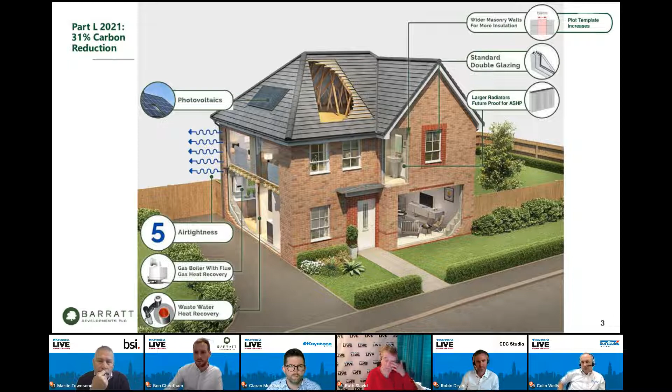And then also, do we implement mechanical ventilation? Not only to manage indoor air quality with continuously running extract fans in wet rooms and things like that, but also to mitigate the risk of overheating. So yeah, this was a couple of ideas - you'll notice a gas boiler there as well.

As I've mentioned, we're looking at a phased approach to introducing air source heat pumps. We know they're going to play a key role in decarbonising our housing stock, both new build and retrofit, but they're not necessarily going to be the only solution. We're doing lots of work around heat networks, and there are other low carbon options being reviewed and looked at, but we're actively using heat pumps today.

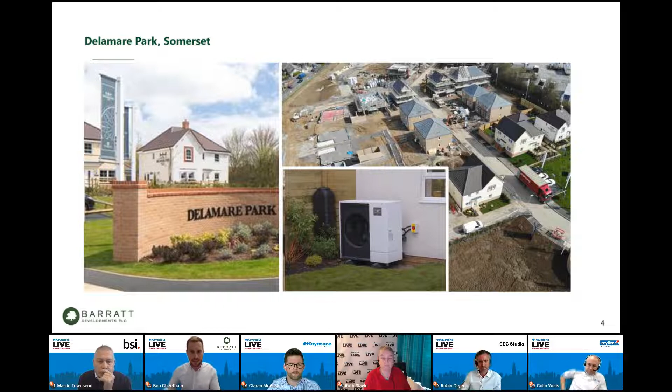We've got customers living in properties with heat pumps, and a few of the challenges to deliver them at scale are really supply chain concerns and installers - there isn't enough accredited installers today to deliver these at scale. So we're currently working collaboratively with air source heat pump manufacturers, government, the Heat Pump Association, and crucially our own contractors. We're really encouraging our own plumbing and heating contractors to get upskilled, go and get heat pump training, and prepare themselves.

I won't go through all of this in the interest of time, but just the knock-on effect of the new technology - we're adding more complexity into the home, so it has a knock-on effect across various departments and areas. I'll just pick a few out: putting PV on every single house type now means less hipped roofs and more gabled roofs, because pretty much the whole roof needs that PV allocation on there.

Customer education - we touched on this a bit in Martin's presentation, but it's going to be crucial. We can deliver really energy efficient zero carbon houses, but we need customers to adapt their behavior and ensure they understand how to operate their homes efficiently.

And then skills and capacity - obviously we're adding new technology, we've mentioned heat pumps and PV panels. As an industry, the target is 300,000 houses. If we're all going after those particular products, it puts even more pressure on an already strained supply chain and the installer base as well. So just a couple of challenges and barriers that we're currently working through and addressing.

And then when we look at how we can deliver a 75% carbon reduction from the Future Homes Standard, it's really everything I've just said - heat pumps or other sources of low carbon heating, but also things like battery storage.

Do we start adding batteries in so the home can become smart about how it manages energy? Actually storing energy, selling it back to the grid when it's more preferential rates, or using it when it needs to, and looking at smart systems to actually manage all the different technology within the house.

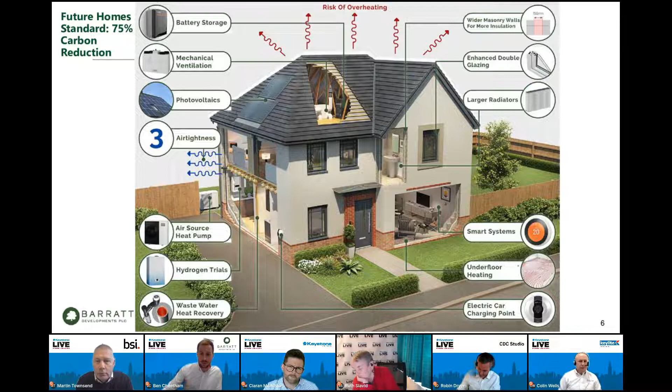And then again, some of the key challenges around delivering the Future Home Standard today. Skills is a real challenge that I've touched on. If we just pick PV out again, our allocation for PV is probably in the region of 90 to 100,000 panels a year, times that by the rest of the industry. It's a lot of PV panels, a lot of installers that we need to gear up and get ready.

Supply capacity, we have seen obviously some serious challenges in the supply chain over the last 12 months. So that remains a concern as we move forward.

Overheating, as we're making our buildings more thermally efficient and with obviously a warming climate, we need to be mindful of overheating. Do we need to start looking at more north-facing elevations, reducing window sizes, or even looking at cooling later down the line at some point as well, be something we need to think about.

And then grid capacity, we're obviously electrifying our homes, heat pumps, EVs, everything will be electric. What impact does that have on the grid? Does it have capacity? There are legitimate questions around that, as well as EV chargers as well, I should add in.

The snake diagram in the middle here is really just to highlight the challenge with heat pumps that we're actively working through. If you're a plumbing and heating contractor today, it's still quite a lengthy process to become heat pump accredited. It can take several years, and there's quite a lot of paperwork involved. So we're actively trying to encourage, how can we slimline that? How can we incentivize our current gas engineers to go away, upskill themselves, and want to do it?

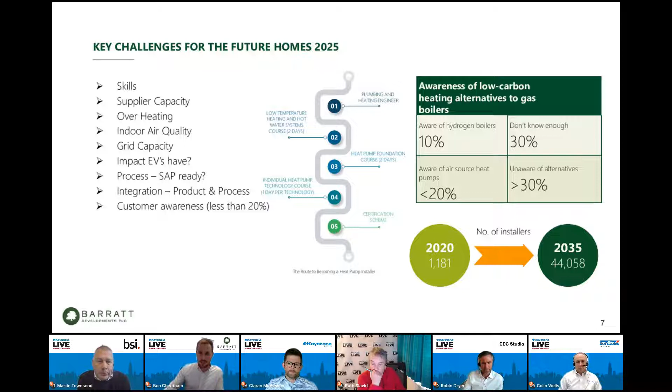And also just a bit on customer education. We're doing lots of research around our customers. There's still a lack of awareness around heating systems, although I would say certainly in the last couple of years, we've seen the shocks to the energy market. More and more of our customers are asking about how much does this house cost to run, what is the heating system, which certainly it never used to be.

And then the second part of my presentation, I just wanted to talk around our Z House. This is a concept house that we built in conjunction with Salford University. It's a zero carbon house, and we want to go way beyond the Future Home Standard. So it delivers around 125% carbon reduction, going beyond the Future Home Standards.

And the idea behind this is we wanted to build not only a zero carbon house, but we wanted to challenge the supply chain in what technologies are available, in order for us to really scale up and be commercially viable for a national developer to deliver at scale. And we had a number of drivers.

We wanted to look at not only regulated and unregulated energy, we also wanted to look at embodied carbon. Embodied carbon is really important, and I'm sure others may pick up on this later. So we looked at how we can reduce the embodied carbon within the property. We also looked at reducing waste, reducing water - obviously water is scarce in certain areas - and also nature and biodiversity, how do we improve that. So there are lots of different areas that we addressed in this sort of concept house.

So we used a combination of MMC systems. I'm just going to run through a couple of these here. You'll see, for example, the roof was actually built on the ground with the PV panels and the tiles pre-installed, and that was craned into position. You'll see here the external brick - they were full brick panels, full elevations that were craned into position. So we actually didn't have a bricklayer on the site.

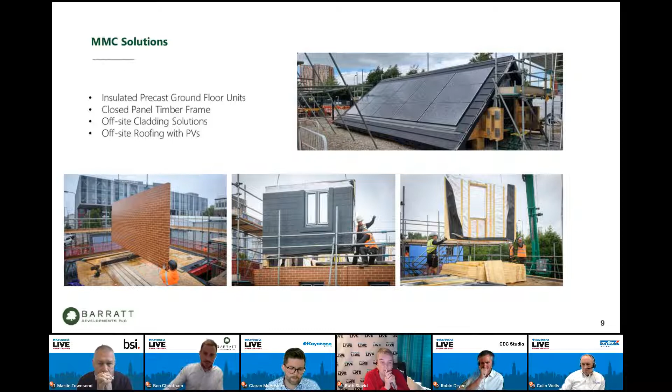So we're thinking about the future as we need to grow our housing. There is an underlying demand. We need to think about different options about how we can not remove the reliance on, for example, bricklayers - they're going to be a key part of moving forward - but to grow further, we need to look at more MMC systems as well. And then low carbon heating: we used a Mitsubishi Ecodan heat pump.

Several years ago with heat pumps, there were a lot of concerns around noises and how they operate. Today, everyone's been pleasantly surprised how absolutely quiet these things are - very quiet, work really well, and provide nice comfort levels in the house.

So air source heat pumps with a hot water cylinder - we also put two batteries in there, two 10 kilowatt batteries, and there were over 25 PV panels on the roof. So all of this technology, really, what it means in practical terms is 4 or 5 days out of the week, it's actually generating enough electricity to support itself without drawing from the grid.

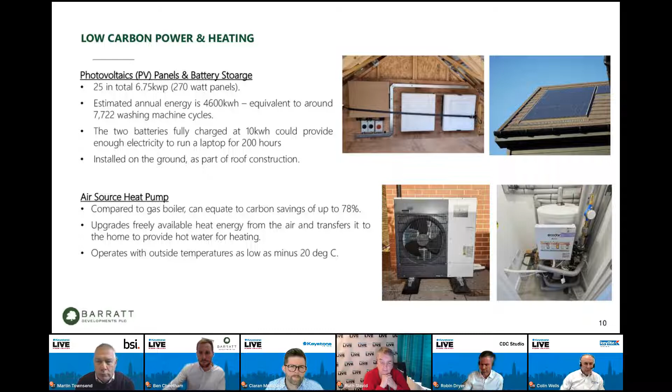So bills on this house were really cheap - I think they were about 30 quid a month, with about 25% of that being a standing charge.

And then we put various emitters in, much to the headache of our contractors. So we put underfloor heating in, and we put radiators. We also put innovative solutions like this thermal - it's called Thermaskirt, a heated skirting board, so hot water pipes running through the skirting board. And we also looked at electric solutions, so infrared heating panels.

So the whole idea around this is we want to test - we have people moving in, and we can independently switch off the different emitters and find out what works, how the occupants are engaging with it, what are the preferences, and this will help shape our decisions as we move forward.

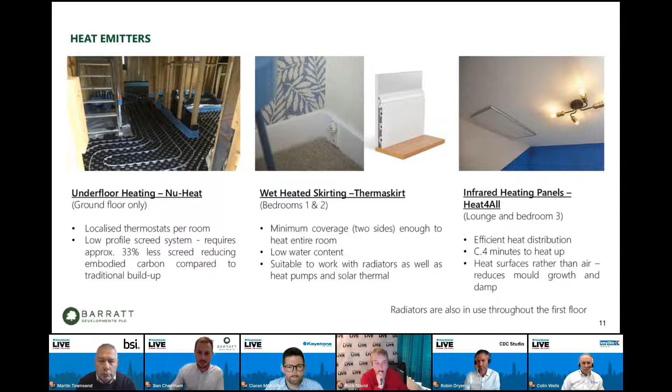And then just a slide on smart tech - so we had lots of smart tech in there around managing the different technologies, voice activated lights and things like that. We also had low flow thermostatic showers.

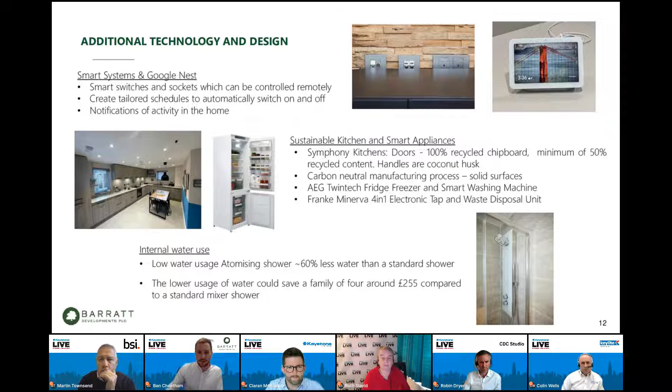So just conscious of the time, looking ahead to the next step - that was a zero carbon house we built at Salford, on the campus. Our next project to further research zero carbon technologies and how we're going to scale up is called Energy House 2. This is a £16 million research facility at Salford.

So it's essentially a large energy chamber, and they can actually control the weather - in terms of wind, snow, rain, and they can make it -20 to +40 degrees. So really we're building a house within this chamber. It's currently under construction at the moment, and we can obviously drop those temperatures.

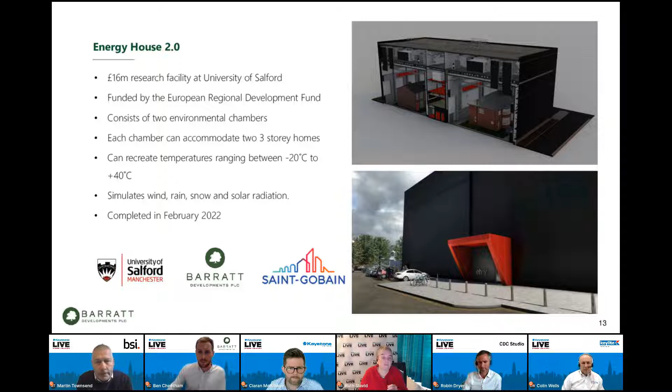We can test efficiencies of, for example, heat pumps and other technologies, and we can learn lessons that we need to take forward as we deliver zero carbon. So here's just an image of where we're at.

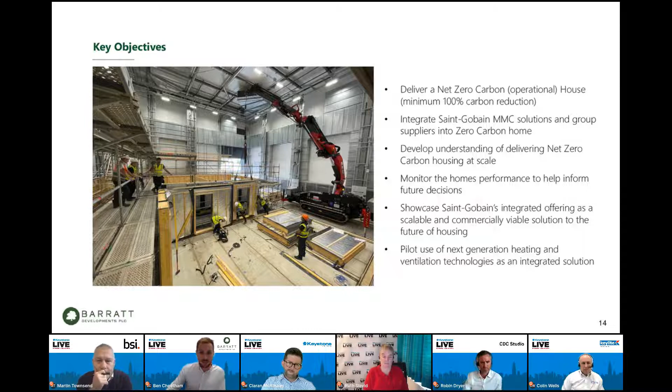So I think that hard data that we're going to get from these projects is going to be crucial as well. So I think really just to sum up, that's what we've demonstrated - zero carbon regulated energy is achievable. We know what we need to do.

There's some barriers in terms of installers - we need to get them ready, we need to get the supply chain geared up, and it'll be a transition. We also need to collaborate with our supply chain - 60% of our emissions come from our supply chain in terms of embodied carbon in the products that we use. And a lot of our suppliers are smaller than us, so it's really important that we collaborate and bring them on the journey as well to drive that carbon down.

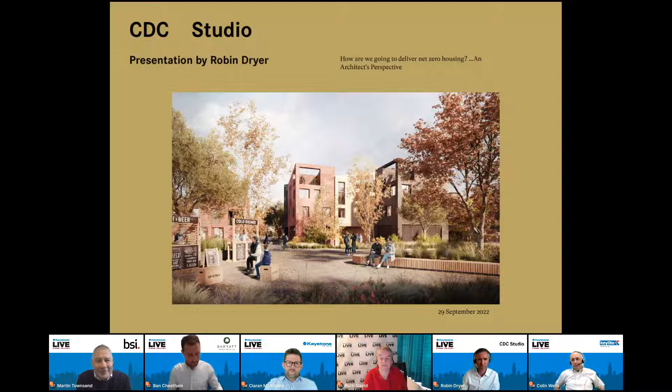I think really the first question is, the UK has set its target for 2050, and it's understanding how we get there. Similar to the previous speaker, there's two elements to this presentation. The first starts by looking at our understanding of where we are and what the market looks like from an architect's viewpoint, and then secondly some of the challenges we have in understanding net zero.

So 2050 seems a long way off, and I appreciate we're not necessarily going to get there exactly at 2050 for net zero—the target is to achieve that before 2050. But I thought it was quite useful to start by seeing, 27 years in the future is 2050.

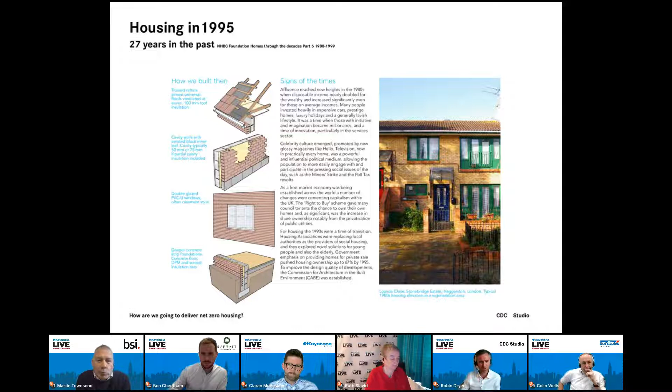But if you look back 27 years, houses broadly—and this came from the NHBC document—we were putting insulation in walls and roofs and a limited amount, if any, in the ground. But the houses themselves were very much similar to what we're looking at today: brick cavity constructions, double glazing. We have moved, and I think we are moving, and there are some really good examples, but I don't think it's moved perhaps as far as it ought to.

If you look at where we're going to be in 2050, I'm not necessarily putting forward that this is where we are going to be heading—I don't think anybody really knows. But I think what we can probably say is that houses are going to be taller, more densely developed as space becomes more valuable, and we're going to be dealing with overheating as the world gets warmer, and that's going to be essential.

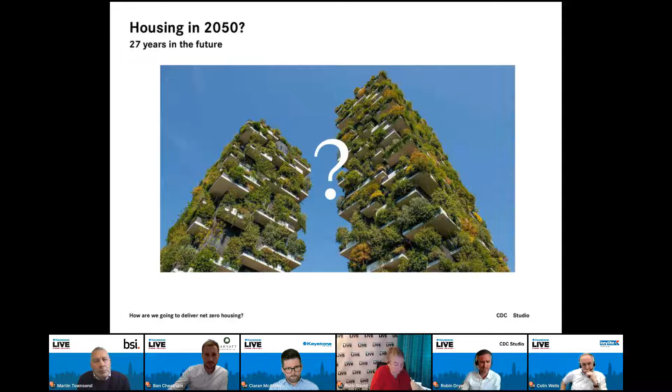But I don't think any of us really know exactly where we're going to be heading. Where we are at the moment, though, is a different sort of picture. I live in Cambridge, and when you look at some key developments in and around Cambridge, it's probably best described as a mixed bag.

I think there's probably an awful lot of gas still being used. I'm not sure there's a lot of photovoltaics on a lot of those developments, and I think a lot of those buildings are being built to the current regulations—for whatever reason, these homes are not being built looking to the future.

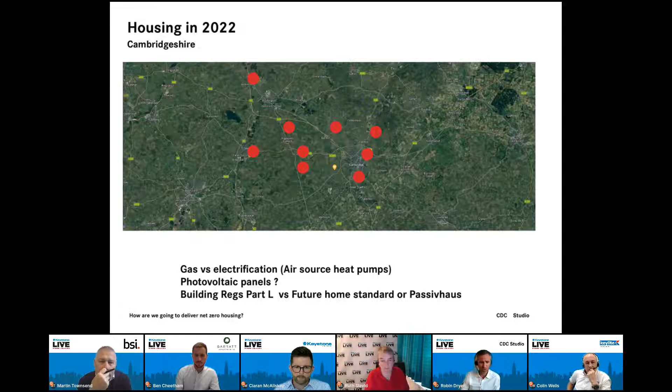I think we'll pick on this later, but if you can imagine some of these homes are being designed now and some are being built now, within 10 years you could be having to replace your gas boiler with an air source heat pump, and that's going to come with a whole range of complications—it's not going to be straightforward. And then you are going to be retrofitting it. If you've bought a house and 10 years down the line you have to start retrofitting things like that, it could feel like something you didn't expect.

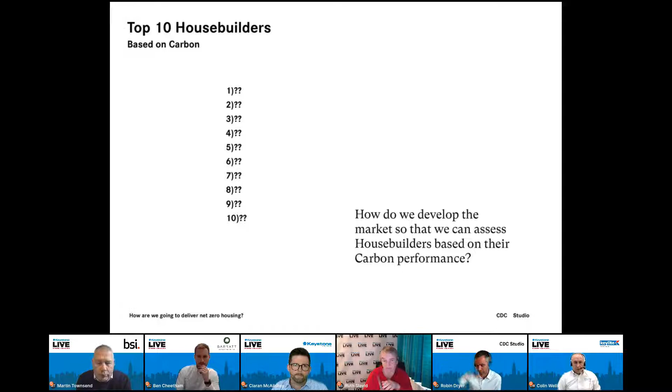When you drill down into these companies, it's interesting that the emphasis is on aesthetic, on delivery, on creating homes, and carbon is low on the agenda, and I think it probably should be higher. What I couldn't find was a top 10 house builders based on how much carbon they have. So the question is, how do we develop a market so we can assess house builders based on carbon, and that will help understand who is doing it right, what homes are doing good.

When you go on holiday, when you go to a restaurant, there's a TripAdvisor that can tell you what's good, what's not good, based on real life experiences. I think it'd be quite nice to have a home builders button on the TripAdvisor website, so people who are buying homes can understand. That slide for Cambridge shows there's an awful lot of houses being built in the area, and it's difficult for consumers to understand which homes are doing what.

I think this is a direction house builders will be going in, though it seems to be slower than we possibly thought it would be. I understand there are challenges on that, but I think this should be the direction we're heading. That previous slide talks about net zero, and I think it's probably worth touching a bit more on what net zero is, particularly from an architect's perspective. If we're going to deliver buildings for net zero, what does that mean, and how does that manifest itself?

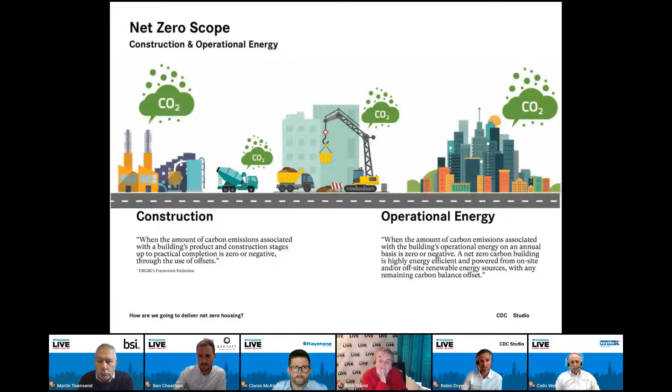It boils down into two camps. The easy one is the operational energy - when you are living in your home, you are operating on a day-to-day basis with zero carbon. Then the other bit is about constructing, building these homes for zero carbon, and actually that's not quite true - the construction bit isn't zero carbon, but the operational bit is the easy bit. So you're looking at low carbon, generating energy to bring your carbon footprint down in operation, insulating so you don't need to use as much energy, and electrifying the energy source so you're coming from a low carbon or zero carbon source.

A lot of these slides I've cribbed, I've found and collected over a period of time. So these are slides which are out there, and I'll give you a pointer perhaps at the end of this presentation.

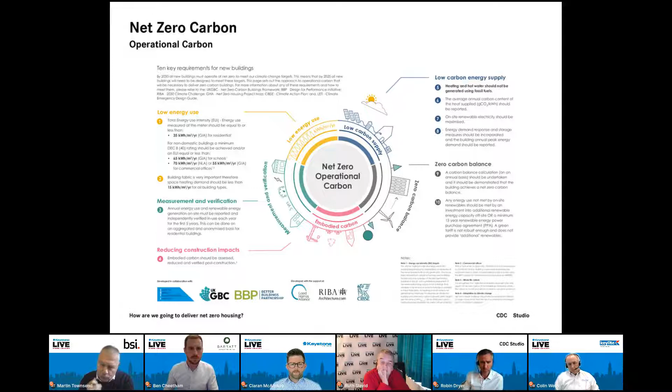Operational carbon, getting that down to zero, I think is relatively straightforward - it is being done and rolled out. I think the hard bit, first to understand and then to actually do, is the embodied carbon in the construction. This is looking at how you integrate carbon, how you mitigate or reduce the amount of carbon all the way from the raw materials - what materials you're using, where it's coming from, and how much carbon footprint that has, all the way through to manufacturing window units, roof tiles, how you're getting it to site, and then how you're building it.

And then once you've built it, it's a whole life carbon. It also picks up on how you look after it. So if you have materials which need to be refurbished or replaced on a regular basis, that's going to incur a higher level of carbon, rather than some products which take very little repair and maintenance. And then the final bit, which concludes all of this, is what do you do at the end of the cycle? That's the whole understanding of the analysis.

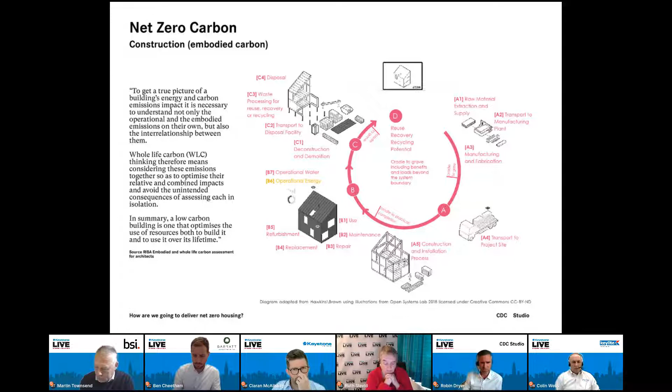I think this is the bit which is harder. It's certainly harder for an architect, and I think it's harder for the industry to come to terms with. There are movements in there, and it is quite interesting.

For the whole life carbon, Sadiq Khan, Mayor of London, the GLA, they have targets. So if you're doing certain developments in the Greater London area, you have to meet certain whole life carbon targets, set by them, and this is something you have to quantify and come back to them with. One example is kilograms of CO2 per meter squared, and they're going to move this target. This is a benchmark for now, and that benchmark will keep moving.

What it's doing is easy steps. So to achieve this it's not completely easy, but it's getting easier, and it will get harder as that target comes down. As an architect, as the design team, as engineers, we need to demonstrate that our buildings are working and can be designed to meet those targets.

So the GLA is one element. There's a document by LETI. If you're not aware of LETI, I'd suggest it's a document you download. It is really important, and within that they've got data and targets for you to pick and choose. These are what you should be working to.

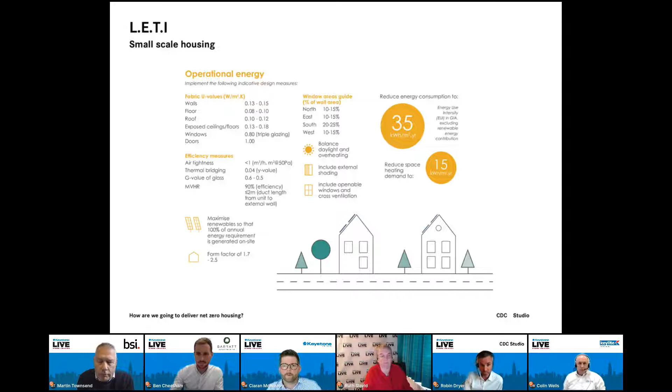So this talks about form factor, it talks about renewables. The operational bit I've talked about, but if you go through the heating, demand, and then onto the embodied carbon, they set targets of 500 kilograms of carbon per meter squared of your footprint area. And how you demonstrate that you've actually achieved that is the challenge. As an architect, that's not easy.

I'm going to move on. What you need is software, and we've had to upgrade ourselves - we've actually purchased the product at the top here, One-Click LCA. How that works is you calculate the mass of each material. We work in BIM, and we break down our BIM model into a schedule of individual materials. That's exactly the shopping list a builder would purchase for your house, and we have to schedule that out up front, give a quantity, and then manually plug that into the software and select products.

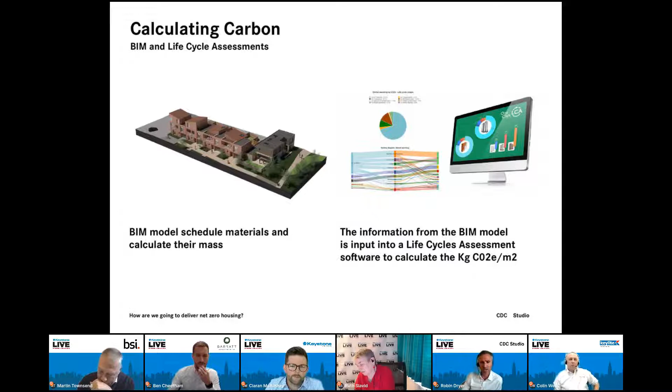The big impact for the industry, and for ourselves - that's not an easy task in itself - but the big challenge is that at an early stage in our design process, we're making an assessment on where that material is coming from. That doesn't really allow for a huge amount of flexibility down the line, if you change it to a cheaper product which comes from further afield with a larger carbon footprint, because that's going to skew your entire data and the figures you need to work to.

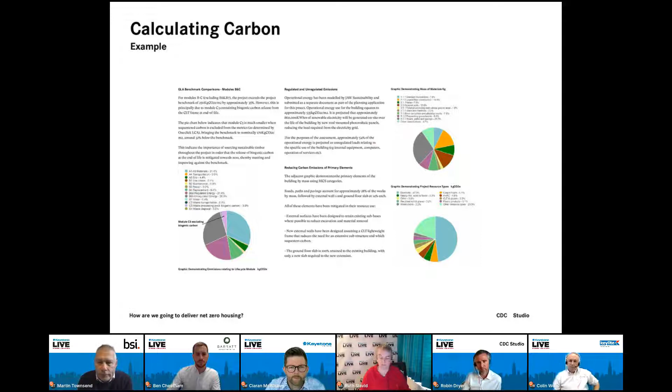And the data which comes out, it's a bit small, but that's fine, it's just a principle. That software gives you charts, it gives you targets, it gives you an understanding of where your carbon is, with big pie charts and big areas. That's important, I think, to the industry, so you can then start challenging. You can understand - it's all about data - where the carbon is on this building. And there's no point tackling the small pies, because it's the big pies you need to tackle. Understanding that is really important.

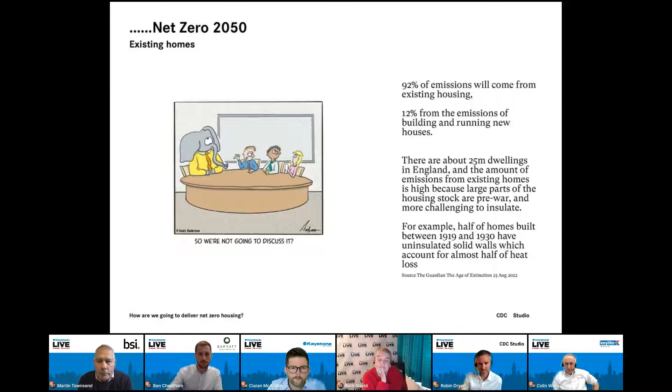It takes an extended program, because we need to factor that in, and it changes and takes a mindset. How we deal with this is perhaps for a different slide. It is going to be very difficult.

My final slide is kind of three things. So what can we do? I think it's top down, bottom up. It would be really good that people are going in - people are buying electric cars, and they're probably asking more pertinent questions on their cars than they will on their houses. I think that will change, so them coming in and asking questions about how their building is being heated, where the energy is coming from, and how efficient that building is, would be great.

Top down, we need more legislation. Future Homes is coming in, and I'd like to see that accelerated. I think it will shift the marketplace. Calculating carbon data, I think, is really important, and it gives everybody an understanding of where we are, and at the moment that isn't completely clear. Communication, changing that agenda, and I've mentioned the retrofit.

Two final things - there's 3 websites there, I'm sure there are others, and they're a very good point if you want more data. And finally, the image on the right - this isn't a project we've been involved in, but we are aware of it. There are developments out there which are zero embedded carbon and net zero energy in use - those are the two things, and a lot of developments are just working on one of those. I think actually getting both is really important.

Right, thank you very much.

Thank you, Robin, that was an amazing amount. I started off being really depressed by those schemes that aren't doing anything, but I think by the end we were seeing ways that things can happen. I wonder how much impact the dreadful circumstances we're living through at the moment are going to have, in terms of people having to look at what their fuel costs are, and wanting to live somewhere where those costs are going to be lower.

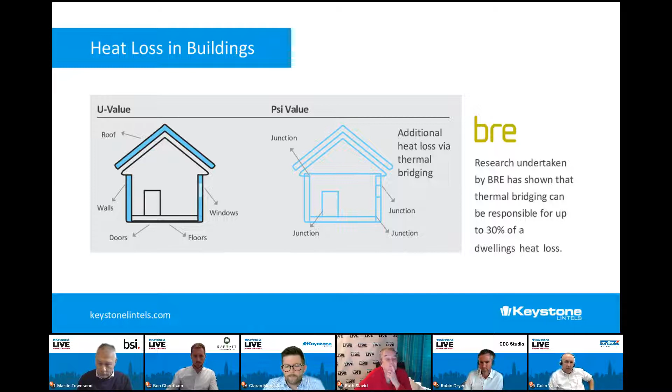Part L is very much seen as one of the first stepping stones in the government's pursuit of net zero due to the significant energy usage of households. In the UK today, the average household emits 2.7 tonnes of CO2 from heating their home, and that's not over the course of a lifetime, that's in a single year. That's the equivalent of charging up about 300,000 smartphones every year.

Part L 2022 calls for the reduction of carbon emissions in new homes by 31%, and that's getting us ready for that future home standard from 2025 onwards.

The common misconception about Part L is that the document is for the process of constructing the dwellings and not the day-to-day running of the household. But of course, this is not the case. Dwellings are being designed as per Part L to produce 31% less carbon emissions, and the document looks at a number of measurements, including fabric energy efficiency, energy rate, and emissions.

The introduction of the energy rate identifies the somewhat haphazard approach that has been taken in the past, where builders or assessors alike have looked to offset the use of inefficient materials by hitting targets with renewables such as solar panels. And that sort of upends the energy hierarchy to a certain extent. So it's sensible to reduce energy demand initially before replacing this with renewables.

Due to a lack of accuracy that had previously been seen, Part L has introduced a number of detailed accuracy measures. Some of these measures are minor tweaks to previous requirements, and others will see a relatively significant change in the way construction is run and how accuracy is assessed.

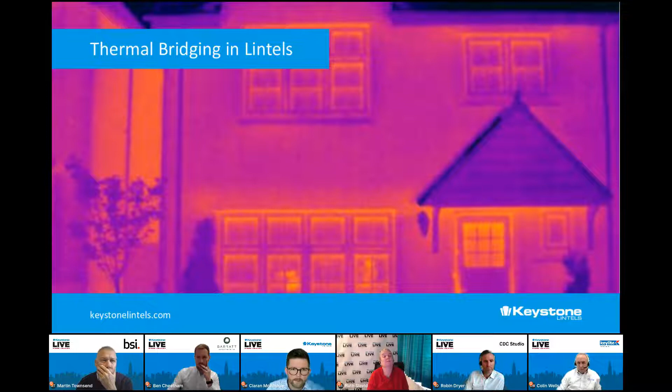With a clear goal of Part L being the reduction of primary energy use, ensuring heat is retained within dwellings is of paramount importance. As such, reducing thermal bridging is a critical component to creating a thermally efficient home. Obviously, as Martin had mentioned earlier regarding the summer, his house is cool in summer, so we always have to take that into account.

Treating Part L as a stepping stone to the future home standard means taking a fabric first approach, which puts us all on the front foot when it comes to designing dwellings to reduce carbon by 75 to 80%. A fabric first approach means designing to maximize the performance of the components and materials making up that building fabric, rather than relying on post-construction additions such as energy-saving technology. Not taking a fabric first approach can mean costly redesign to meet future home standard requirements, which is coming fast down the track.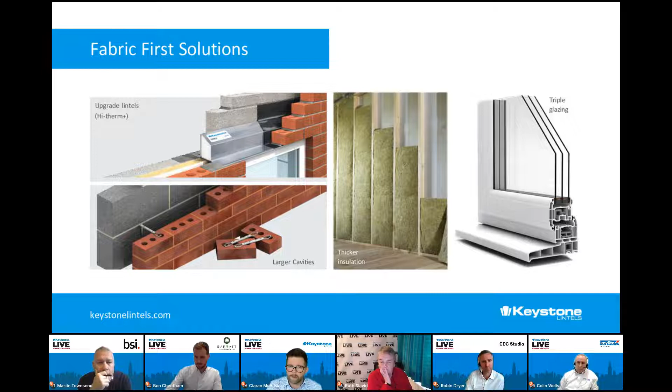On the slide, we have a few examples of materials which can be considered to meet the new requirements of Part L. Of the examples shown, perhaps lintels are the only true fabric elements which are not easily changed in future, which is why we stress looking at solutions before we get to bolt-ons or retrofitting, and why we would advocate the use of Hi-therm+ lintels.

Specifiers are actively looking for the most cost-effective and efficient way of meeting the ever-tightening building regs. Alex Brooks from AES Sustainability Consultants described it as essentially replacing a lintel with another lintel, which is attractive to house builders as it meets the targets required in an efficient way and provides effectively an easy win.

On screen you can see the Hi-therm+ lintel. They work in the exact same way as standard steel, with one major difference: a second material has been introduced along the upstand of the lintel, known as a polymer isolator, which isolates the inner and outer leaf of steel and helps create a powerful thermal break. Working alongside that is a CFC-free insulation, which ensures compliance with Part L by maintaining continuity of insulation throughout the dwelling.

Finally, as you can see, you've got that warm inner leaf of galvanized steel highlighted in red, offset by the cold outer flange represented in blue, indicating how heat is retained within the dwelling. The lintel also has the flexibility for coastal or corrosive areas, with the ability to replace the galvanized outer flange with stainless steel. Put that all together, and it allows Hi-therm+ lintels to be 5 times more thermally efficient than standard steel lintels.

So as standards and regulations tighten, the impact of switching lintels alone can be significant, with Keystone investing heavily in research and development to engineer the Hi-therm+ lintel for the industry and the end user.

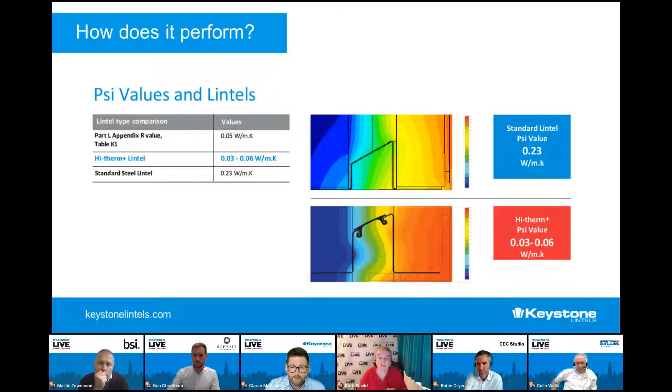Increased regulations do lead to increased building costs. The current cost of living crisis and the global supply chain issues are making all sectors think differently, creating a step change from consumers in how to heat their homes more efficiently.

So whilst we accept there's a cost uplift in specifying Hi-therm+, from our research this was significantly cheaper than increasing the specification on the insulation. As such, we were able to deliver a cost saving of nearly just under £12,000 for the Britannia Gate project.

Just before we wrap up, I wanted to mention briefly what Keystone Lintels and the wider Keystone Group is doing in its own commitments to net zero and sustainability. Keystone's looking to lead the way with innovation in construction and sustainable performance, building decarbonisation into all business operations to become one of the first UK construction product manufacturers to achieve net zero for our sector. We want to adhere closely to new policy or be ahead of the curve in achieving net zero 2050, using 100% renewable energy, securing a fully sustainable materials pipeline, managing 100% of our waste, and using a 100% sustainable fleet operation. To date, we've implemented considerable amounts of this, but there's still a journey to go for us and for many companies as we progress through the decade.

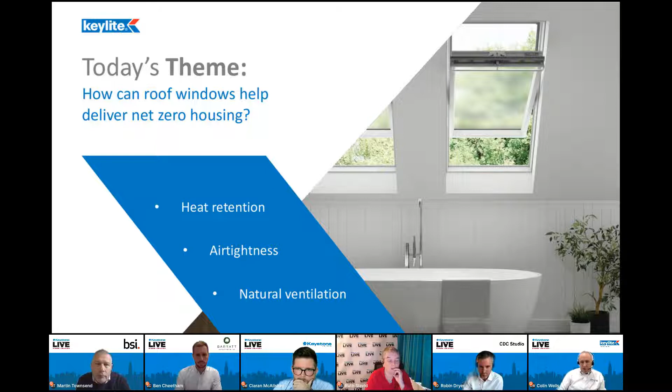To prepare for today's webinar, I really just asked myself, how can roof windows play their part and help deliver net zero housing? Ben, you mentioned about asking your suppliers to adapt and try to come up with ideas to help you as a builder, or to provide net zero housing. And the answers that I can come up with from a roof window side of things are heat retention, air tightness, and natural ventilation.

Firstly, I want to look at heat retention and air tightness. The most recent version of Part L states that gaps in insulation can cause significant heat loss and create risk of condensation. And what does that mean for roof windows?

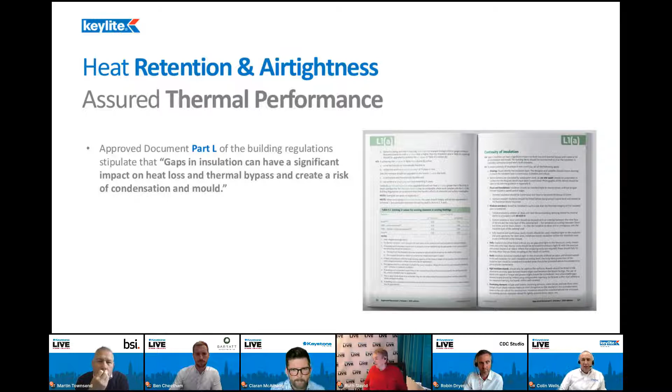The reason for this is that when installers are installing a roof window, every roof window manufacturer recommends that the opening for a roof window is 40 to 50 mil bigger than the actual window itself, and that's to allow for ease of installation and for the roof window to be square in the roof.

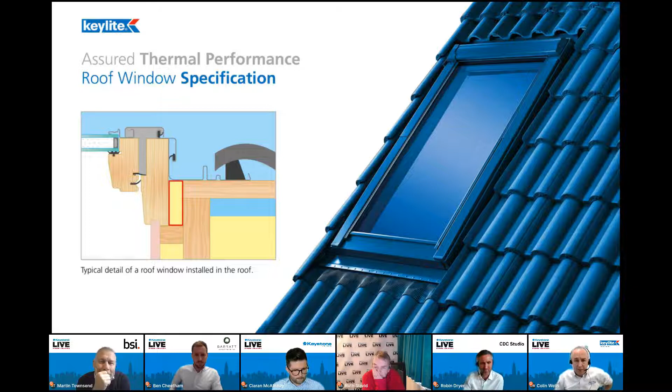But unfortunately, this doesn't always happen, and there's a huge percentage of roof windows being installed without the thermal collar. Try to guess what that number would be - it's pretty substantial. Our recent market research suggests that 97% of roof windows are installed without a thermal collar, which means you have a greater chance of heat loss in this area.

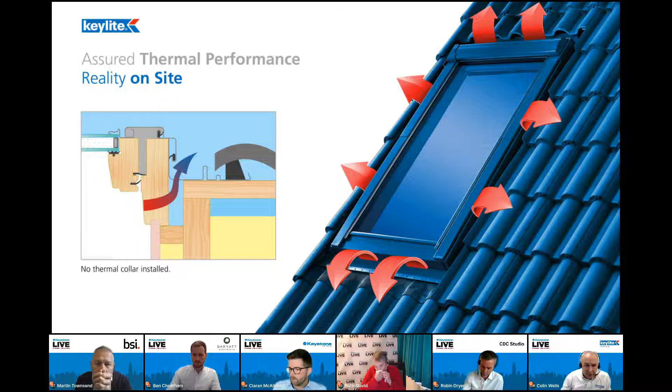This detail doesn't match what the architect or roof window manufacturer is actually specifying, but unfortunately this is the reality on site. With no thermal collars installed, we call this the performance gap. You can see on this detail that the gap has been left clear and the heat loss is coming out through the frame. This is the grey area of roof window installation. Who's responsible for it - the joiner, the roofer, or the insulator? Nobody really knows the answer.

So off the back of this, I want to look at some of the reasons why the thermal collar is not being installed. It's an additional product at an extra cost per roof window, approximately £30 per roof window to purchase this additional thermal collar. It's an additional component, so it's not in the window box as standard - it's something else you have to buy. A lot of people, when roof windows are being purchased, think it's just the window and the flashing, and that's it, off we go.

Again, it's specified and the manufacturers recommend it, but unfortunately the merchants wouldn't hold it in stock, so it has to be pre-ordered in and may have a longer lead time on it.

So after identifying these issues, Keylite has taken ownership of this, and through extensive research and development, we have eliminated the installation weakness and filled the gap with our patented expanding thermal collar. This is assurance that what is specified on the drawings is a reality on site. This unique feature is integrated into the frame of every single roof window, regardless of size or specification.

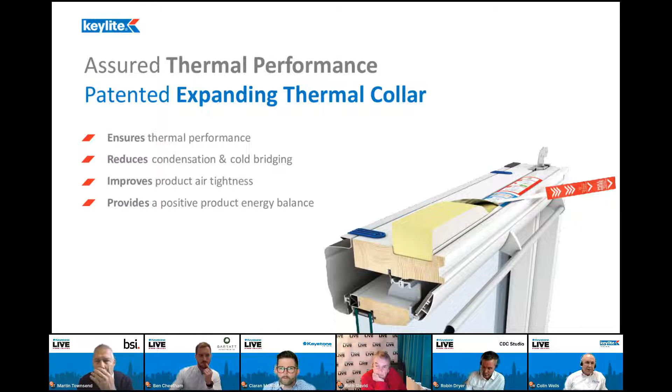For example, a typical roof window has a U value of 1.3. If you install it into a roof opening and don't insulate the gap, that roof opening U value could be as high as 1.7, whereas if it's fully insulated with a thermal collar, the roof opening will be 1.3, in line with the roof window itself. So I want to explain how this works.

I've got sections here through a roof. On the left hand side, you'll see the detail with the gap - the roof window with the glass, the frame, and the section across the roof - and you can see that the gap is uninsulated. On the right hand side, you can see the same section, only the insulation is in the gap.

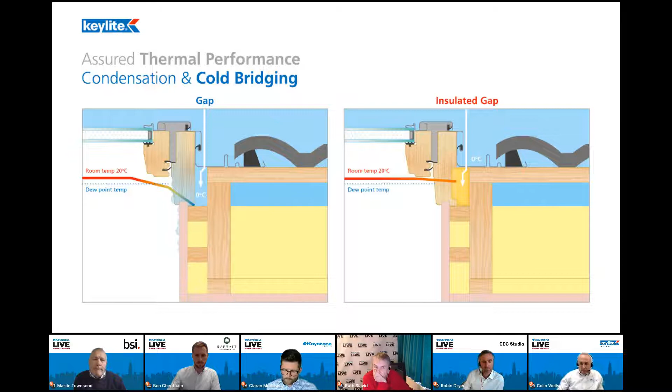If it's 0 degrees outside in the roof, it means it's 0 degrees in the gap. So what occurs here is heat loss, from the inside of the building to the outside. I'll just zoom in on this detail slightly.

You can see the surface temperature of the glass is at 17 degrees, and inside the room it's at 20 degrees. But because it's only 35 millimeters of timber really between the inside of the room and the outside, the surface temperature of the frame drops below the dew point. Unfortunately, this will cause condensation and mold growth. By not addressing this gap, there's a higher chance of condensation and mold growth on the frames of the roof windows.

By activating the thermal collar to fill the gap, this helps prevent the heat flow through the frame and increases the surface temperature of the frame, keeping the surface temperature above the dew point.

On the diagram on the right hand side, we can see there are now temperature gauges added on the glass and on the frame. With that room being 20 degrees, same as the diagram on the left, we can clearly see that the glass stays at 17 because the room is at 20 and the glazing unit is the most efficient part of this window. But with the thermal collar added, we also keep the frame surface temperature at 17 degrees, which keeps it above the dew point.

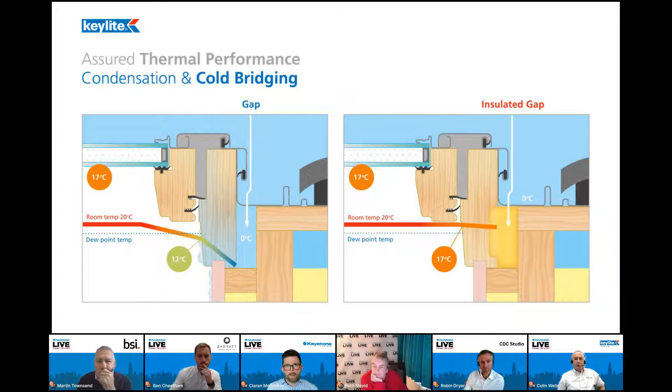Keylite approached the BRE, the Building Research Establishment, to demonstrate the impact that Keylite roof windows' thermal collar has on the risk of internal surface condensation on the frame. The BRE conducted tests and produced a condensation risk analysis report which stated that the thermal collar would be necessary to prevent condensation and mold growth, confirming our own internal reports and findings.

Okay, so that's heat retention and air tightness covered. Just showing you that this collar has been available on the market for years, but it's very rarely used. It's something now that we have added onto our product at the same cost - it's not additional now - just to try and take ownership of the actual issue and try to eliminate it.

The final point then is ventilation. Due to houses being built now becoming more and more airtight, and the latest version of document F increasing background ventilation requirements in some cases from 5,000 millimeters squared up to 8,000 millimeters squared. Our houses nowadays don't have gaps under the front door or leaking air through the ceiling or chimneys, so background ventilation is becoming more and more important.

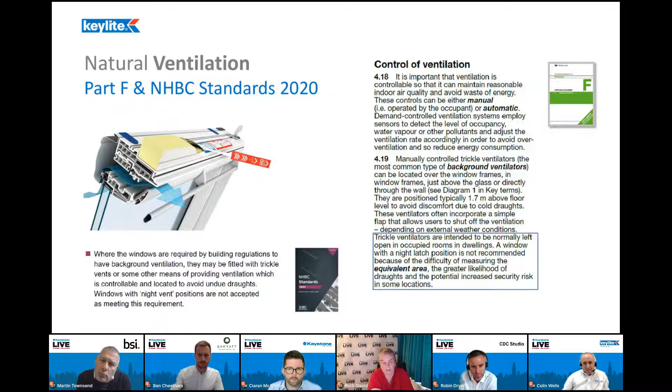So, final thought from Keylite. Heat retention is standard on every Keylite window. Air tightness is standard on every Keylite window. And secure background ventilation is standard on every Keylite window. Again, I'm open to take any questions afterwards, and I look forward to answering them. Thank you.

Thank you very much indeed. I think that was fascinating, mostly to see not only the level of problems with installation of standard roof lights, but also that you've come up with a solution which is not really even technically new. It's just a way, and a very important way, of getting round what you have seen as a general malpractice.

Now, we fortunately have got some time for questions and to discuss all those things that came in. I'm not quite sure, are we going to see our panel all together? Maybe not. But I thought, in light of that last presentation, it was really interesting to pick up a question where someone's asked, how does the panel propose the facilitation of education and support for smaller jobbing builders on how the new regulations affect them and how they can comply cost effectively?